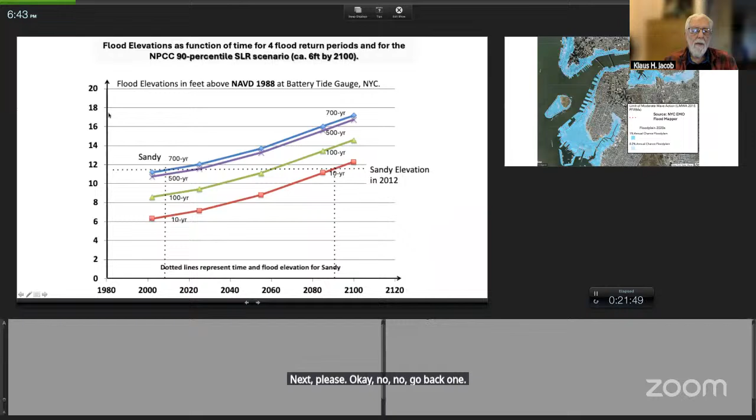Thank you, and can I please have slides? Mission control, mission control, Klaus hailing. Go to the next two. One, two. And then to slide number three. Next, please. Okay, no, go back one. Bad, thank you very much. Maybe go into presentation mode. Yes, please go to presentation.

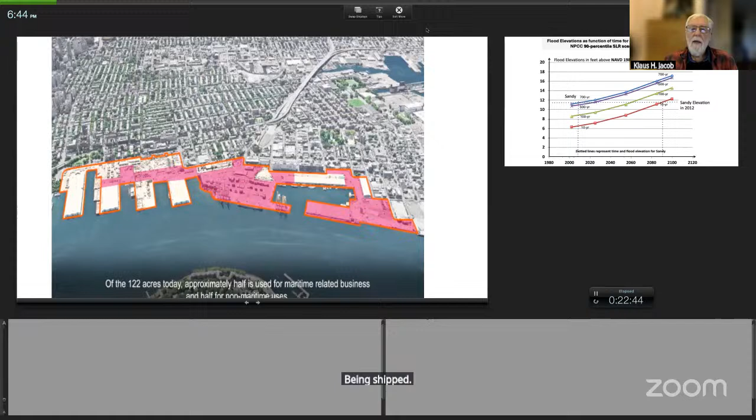Well, maybe I start talking without slides. After all, the Brooklyn Marine Terminal, by its very definition, will have to be on the waterfront to be accessible to ships and goods being shipped.

In that slide you saw for a few seconds, there were red areas and white areas. The red areas are currently used for marine purposes, while the white areas are either unused or for other commercial purposes.

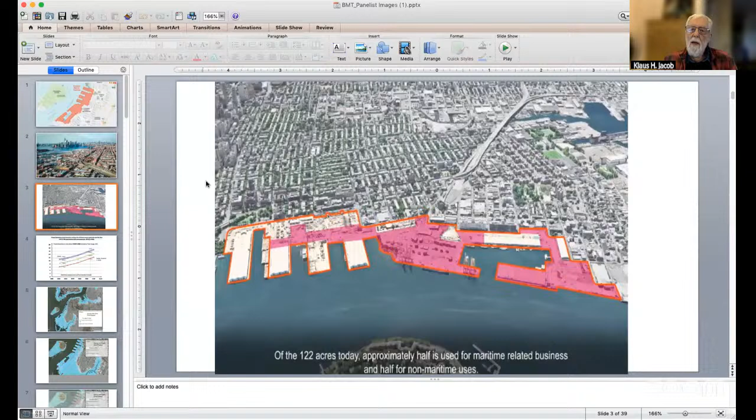Since it is on the waterfront, we have to cope with sea level rise and coastal storm surges on the waterfront itself, and of course with other hazards such as severe precipitation inland, as in that project in Red Hook.

Here you see a scale from about the year 2000 to 2100 in four different colors: the elevations for a 10-year storm, a 100-year storm, a 500-year storm, and a 700-year storm. I won't go into the definition, but a 100-year storm has a 1% chance of occurring in any given year. At the year 2012, or where that dotted line is, that's when Sandy occurred. We are now at 2025, where the next set of squares is plotted on those lines.

As you see, these storm surges get lifted up over time because of sea level rise. That means if you had 11.5 feet of storm surge during Sandy in 2012, which is a 700-year storm, it takes in the year 2090 only a 10-year storm to reach the same elevation. Divide 700 by 10, that's a 70-fold increase in the coastal flood hazard. That's what we have to consider: the combination of sea level rise and storm surge.

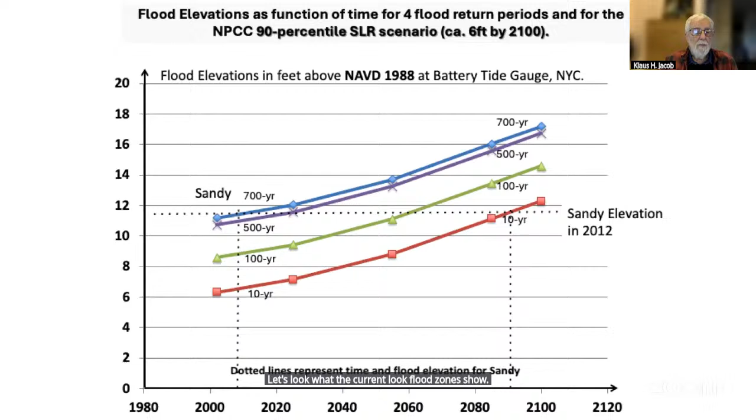Now let's look at what the current flood zones show. This is the New York City Flood Mapper. You can go to the city website under New York City Flood Mapper and find this map. The darker blue is the 1% per year flood zone, and the lighter one is the 500-year, or 0.2% per year, annual chance of flooding.

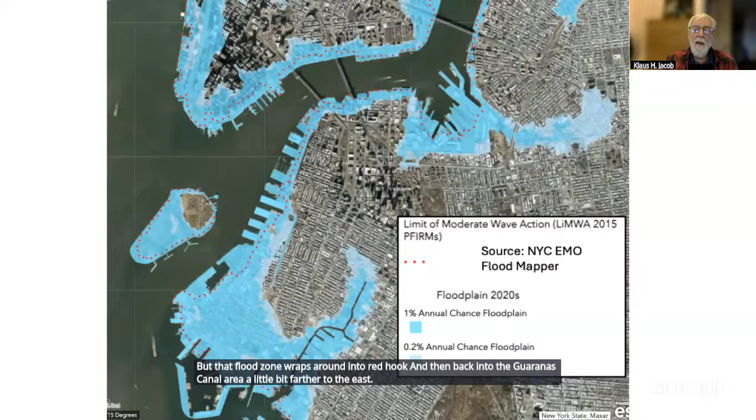And we have the area opposing Governor's Island being considered for the Brooklyn Marine Terminal. It sits in a flood zone. That flood zone wraps around into Red Hook and then back into the Gowanus Canal area a little bit farther to the east.

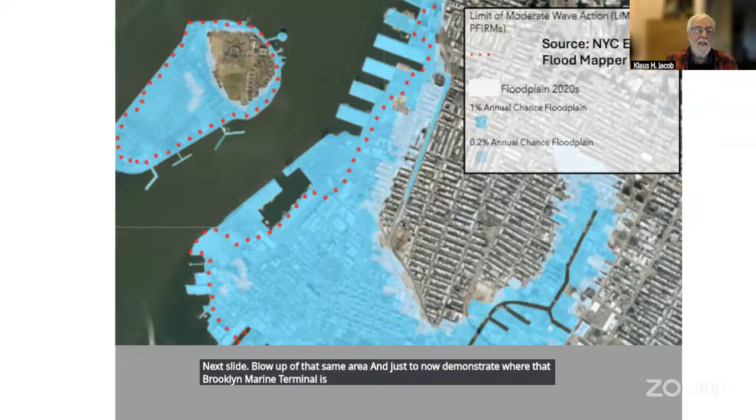Next slide is a blow-up of that same area, just to demonstrate where the Brooklyn Marine Terminal is. Here you have it superimposed. It goes from the northern end of Governor's Island to a little bit beyond the southern end, opposing it, and sits squarely in the flood zone.

So, given that, what are the design options for this project? How do we either protect those future investments planned for the retrofit, or how do we design it if we don't protect them by flood walls, but simply by sheer elevation?

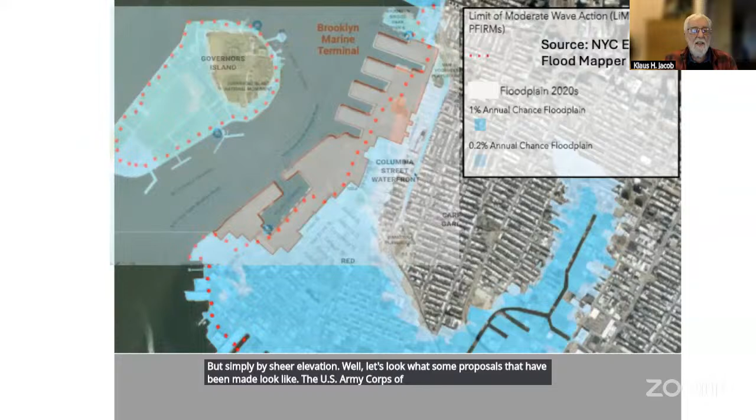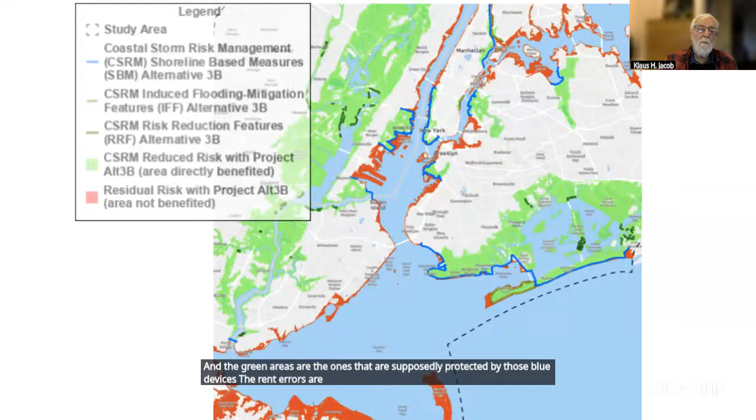Next slide is simply a blow-up of the same thing, where I show with this little rectangle next to Governor's Island where the Brooklyn Marine Terminal sits. As you can see, the Brooklyn Marine Terminal proper sits in the flood zone and is not protected by this blue signature.

It's not clear what the US Army Corps of Engineers plan had in mind, whether they would provide protection with their own financing or with the city.

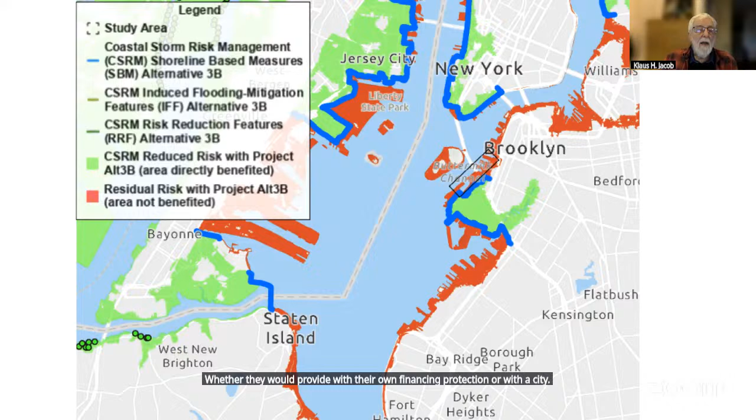And when we look at that, that's what we get. They have a flood protection system at elevation 10 feet above the North American Vertical Datum of 1988, which is the reference for all flood zone maps and other projects.

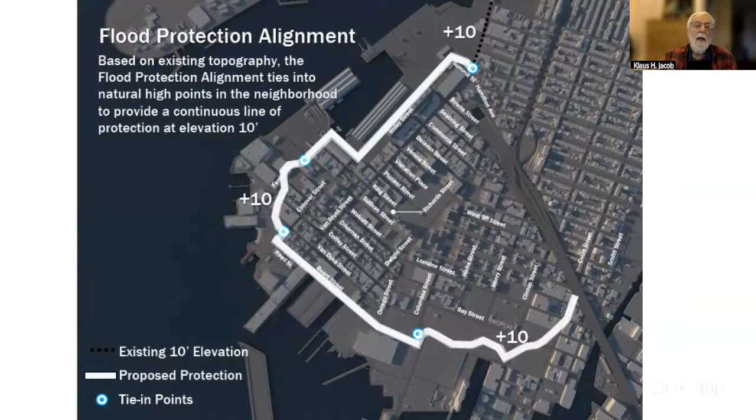If you go forward one slide, you see that only in the upper part of that project does it have a flood wall. Then it simply uses the natural grade of the streets, and then goes again back into the southern part of this project to a flood wall. But it does not connect over to the Gowanus Canal that I showed you earlier—it's an opening for floodwater coming in the back door into Red Hook.

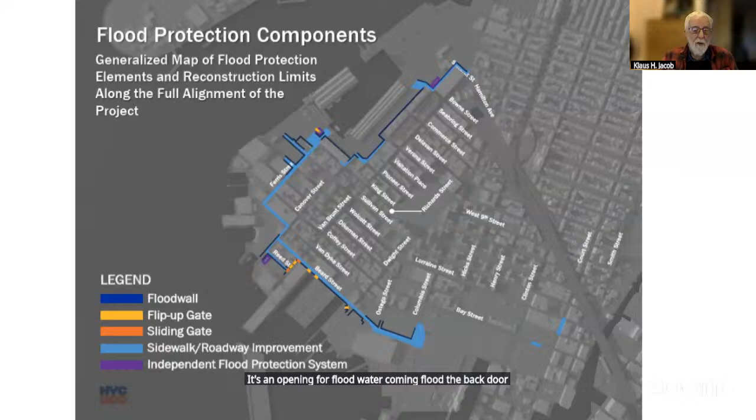Given that, go to the next slide. The area that is protected sits behind essentially the white area, and supposedly a little bit behind it to the northeast, which is where the elevated portion of the Brooklyn-Queens Expressway runs, this dark feature connecting the upper white line with the lower white line. Beyond that, the elevation is high enough that we wouldn't have to worry.

But go now to the next and last slide that I have in my presentation.

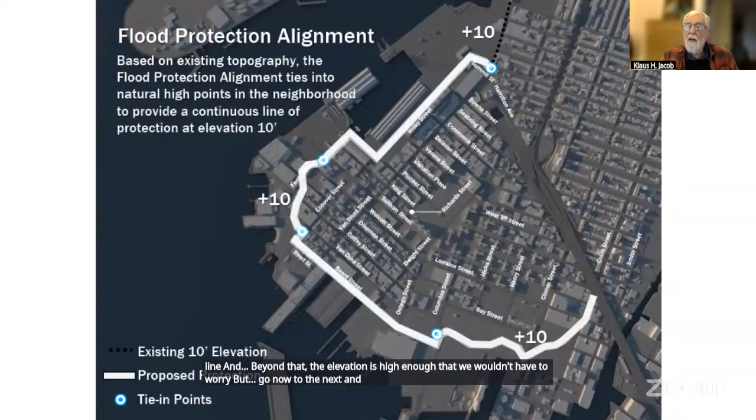Look where 10 feet is on this earlier plot that I showed you. At current sea level, this orange line that goes down in the year 2025 covers a little bit more than the 100-year flood zone. But on the waterfront, you also have wave action, so 10 feet is just barely making it. But that's at current sea level.

Now the sea level goes up, and you see where this horizontal orange line at 10 feet crosses in the year 2070, the 10-year storm surge, which means that the flood protection the DDC is having in mind will be overtopped already just by a 10-year storm, not to speak of the 100-year storm, which will be overtopped in the 2030s.

So I do not see at this moment what this project has in mind to protect its own properties on the Brooklyn Marine Terminal property proper, or anything behind in the neighborhoods of the Columbia Street waterfront district or in other portions of Red Hook.

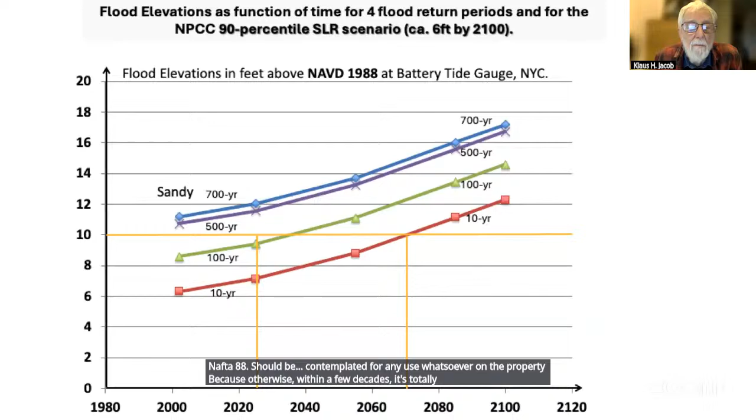My suggestion is that no elevation below 14 feet, NAVD 88, should be contemplated for any use whatsoever on the property, because otherwise, within a few decades, it's totally wasted investment. Thank you, and I hand over to, I guess, Gita is the next speaker.

Thank you, Klaus. Hard act to follow.

Klaus has an incredible amount of detailed information, but I have to say it's actually really, really critical and very important to be looking at those hard numbers in terms of our floodplains and our sea level rise in order to truly understand the potential of both the site and the neighborhood in general.

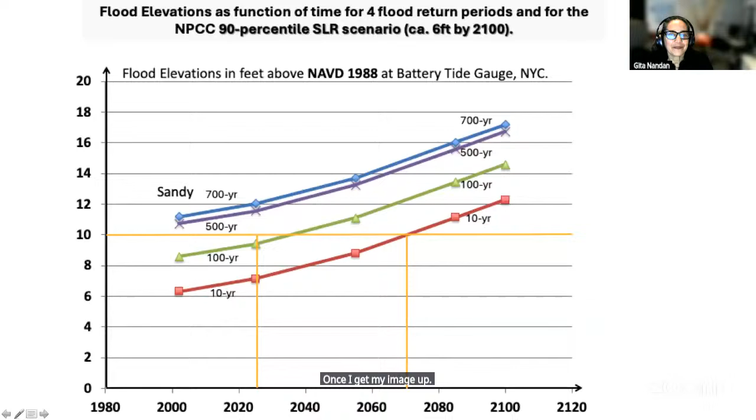And with that, can we have my first slide, please? I am going to try and keep my portion succinct once I get my image up. And so, playing a little bit off of Klaus's presentation on the data, which is very important as a starting point. Data is where we should always have our foundation for planning our futures.

And so the question really is, how does this BMT project, which lies on our shorelines at over 120 acres—we just heard close to 200 acres when we look at the water being included—and it also stretches for about 3 miles along our coastline. Red Hook is about 8 miles in circumference, and the BMT is about 3 miles. So a third of our coast, which, when we're looking at coastal edge protection, is a real significant player.

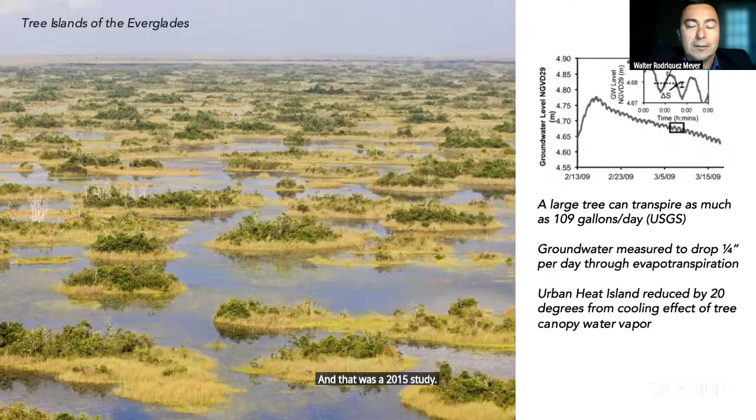In 2016, my firm was commissioned to design Miracle Mile and Giralda Plaza in Miami, in Coral Gables. It was a soggy district that would flood with summer rains.

We took that Miracle Mile concept and embedded in it Dr. Leonard Scinto's science—his work on whether an entire district could become a tree island and help lower the groundwater. It was published in the New York Times because it worked so well that it was tested by Hurricane Irma, and a lot of the businesses were able to open the next day after one of the heaviest rains in many years in Miami's history. It took Miami many months to recover from that event, but in Miracle Mile, it was untouched.

Next slide. How do you take a tree island concept and bring it through an entire district? You look at the subsoil, the subsurface condition—excavating the impervious urban fill in a city to get down to the porous subgeology, and connect the groundwater to the trees by creating a porous soil condition through structural soil or other means of getting connectivity from the surface to the ground.

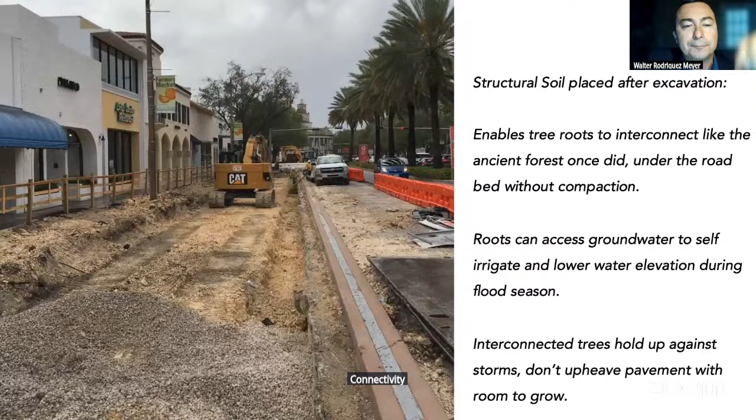Next slide. In this project, it involved excavating the entire right-of-way from facade to facade, backfilling with structural soil. For lack of a better term, we call it a living street, because there are tree roots under the travel lanes. Miracle Mile had travel lanes that were a state highway coming through the city blocks. Giralda Plaza was a local street converted to a promenade that occasionally has traffic and was rated for fire truck and sanitation vehicles, which come through daily.

Shop owners can put their alfresco dining out of their shops and gain square footage, and at night they fold that up—the shop owners manage the street. This is just to show that you can design streets in low-lying areas by managing groundwater to buy time.

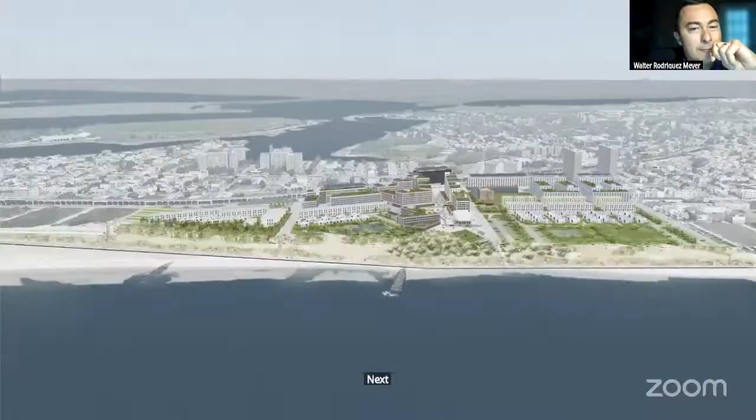Some of these specs are starting to be built in New York. We had projects built before Hurricane Ida that were pilots in the Rockaways. Rockaway is comparative to Red Hook, similar elevations, in some places lower. It's kind of the canary in the coal mine for New York City. This project, Arverne East, is the same acreage as the project we're discussing today. It's just slightly over 120 acres, several billion dollars in real estate coming, and that's now under construction.

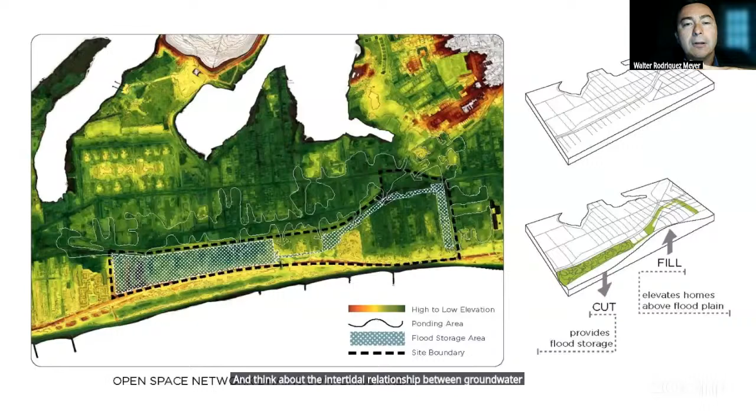This project started with groundwater, and we're recommending that as BMT moves forward, to connect itself to the groundwater, to connect itself to the bathymetry in front of it in the salt water, and think about the intertidal relationship between groundwater and tidal water. Why? Because from there we can build out not only some of the cultural dependencies in water that Carter Craft laid out, but we can start to build resilient infrastructure that is holistically managing water from clouds in the sky to the water in the ground underneath.

In the case with Rockaway, it was a story of Arverne East taking a cut and fill balance project that understood that the ocean side is high elevation, the bay side is medium elevation, and the bowl in the middle is where the groundwater is most exposed. So the most frequent flooding happens near the middle of the peninsula, not at the edges. And you may see in Red Hook during king tides, you may be blocks from the bay or from the harbor and see water bubbling up in the drains. And that is normal in Rockaway as well.

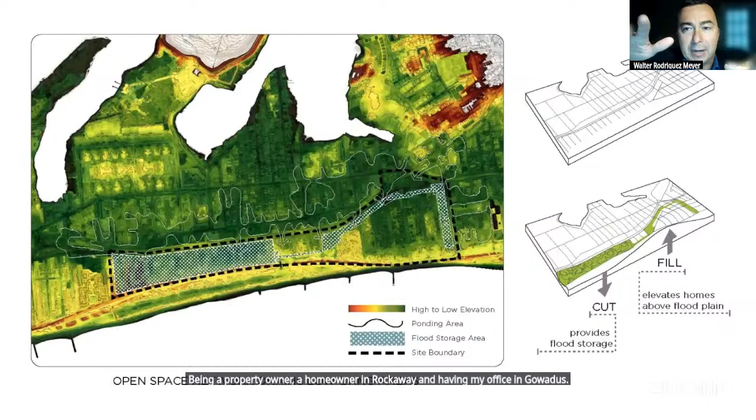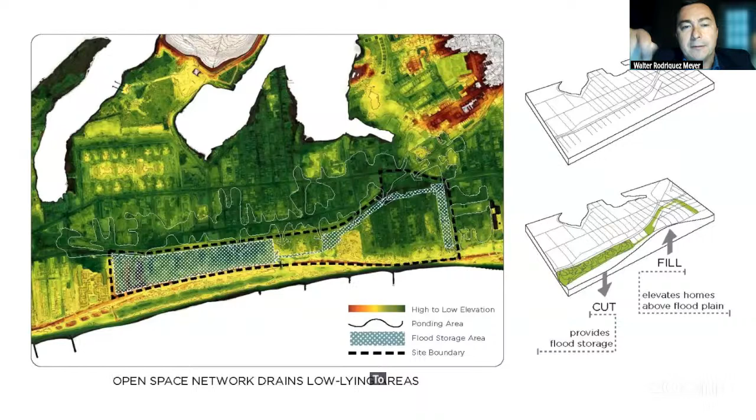Being a property owner, a homeowner in Rockaway and having my office in Gowanus, I compare the two of them and I take my motorboat from my bay house in Rockaway to Gowanus Canal. It takes about a half hour to commute. And that allows me to see the correlation. Sometimes on a king tide, I can see drains that no longer flow.

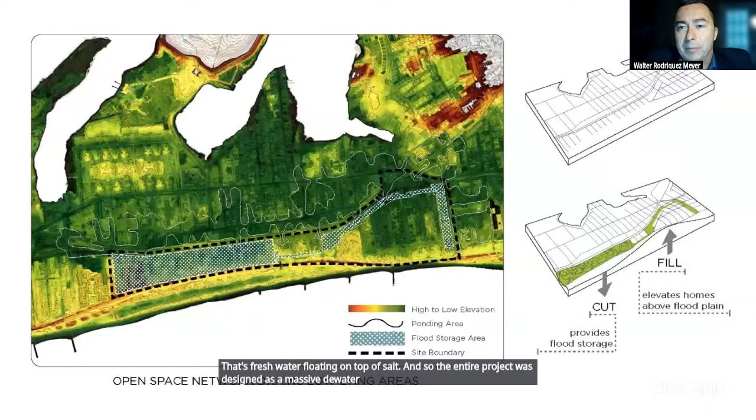And in places like Rockaway, when those drains backfill during the king tide, your only line of defense is green infrastructure. So this project took that thin white line you see in the center, which is the kind of freshwater bubble that's exposed during king tides. That's fresh water floating on top of salt. The entire project was designed as a massive dewatering project using soil-based subsurface gravel wetlands and connected rain gardens.

Thinking holistically across jurisdictions and funding, so not just think of BMT, but think of the neighbors around you and the businesses around you. Red Hook is unique in that there's very few lots that are discontiguous, and organizations like the O'Connell organization have really been thinking about the business side of things. It's one of the largest landowners outside of the city in Red Hook. I think integrating business into this, also integrating the community, and activating the water as much as possible.

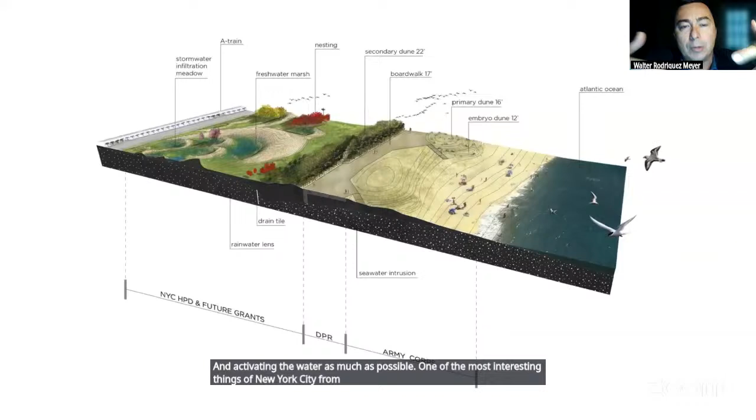One of the most interesting things of New York City for me as a maritime person is South Street Seaport or the Mary Whalen, which is in Red Hook, to visit those boats and have more boats activated, both for private, public, institutional, and all layers of culture in the water, not just at the water.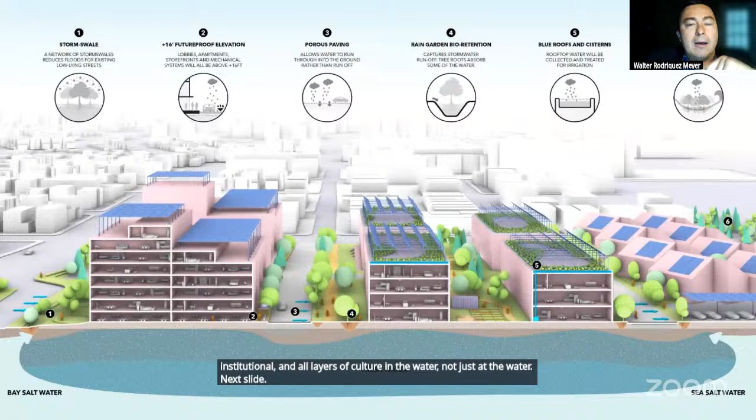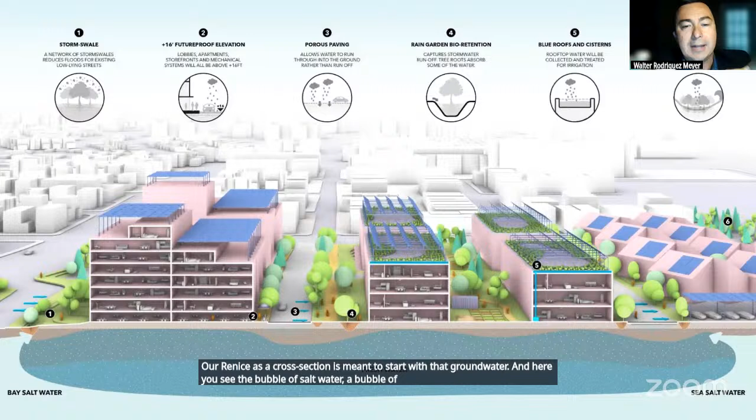Arverne East, as a cross section, is meant to start with that groundwater. Here you see the bubble of salt water, a bubble of fresh water floating on top of salt, and how that's co-managed throughout the project. We elevated to +16 for the streets and the first floor elevations to all match, so urban design is resilient, not just elevating the buildings only. The adjacent neighborhood had low-lying streets, so we improved their condition by creating a belt of low-lying green infrastructure that's the lowest point in the neighborhood, which helps to de-water the existing streets, not just our own.

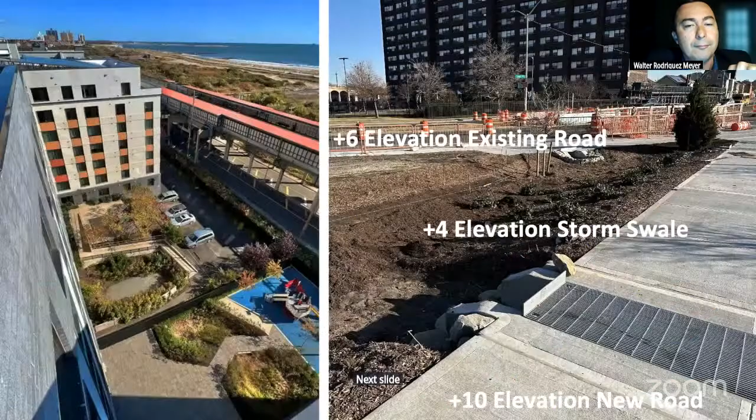This is photography fresh from the site. Pardon the roughness of the construction, but it indicates how we get from the high ground of 16, on the right of the slide, sloping down with ADA compliant universal slopes to the existing roads, which are +5 and 6, and then having even lower network green infrastructure that is a mile long of network systems that de-water the groundwater. The issue in New York City right now is our guidelines only allow for green infrastructure that's above the groundwater, several feet above, which eliminates zone 1.

That eliminates Red Hook from technically having green infrastructure. What we've introduced by partnering with Nick Patnotny from DOT and DEP, and Alan Cohn, is creating pilots of built subsurface groundwater management green infrastructure that has a new set of rules transferred from other jurisdictions.

Some of these projects were built before Ida. The image on the left is Beach Green. It had a groundwater management landscape as well as a bioswale for managing surface water and roof runoff. This entire slide is all one big living system below the surface. So below the parking lot, below the porous playground, below the porous paving, all that stuff is interconnected with one big root system through one massive structural soil that goes several feet deep.

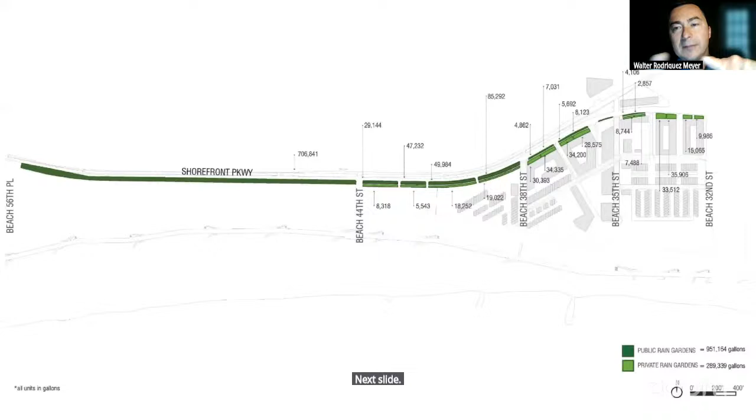As I mentioned, this is a cloudburst street. It's built, and we can go do field trips in the spring. It's over a mile long of networked green infrastructure. Stormwater is managed in the street, at the edge of the street.

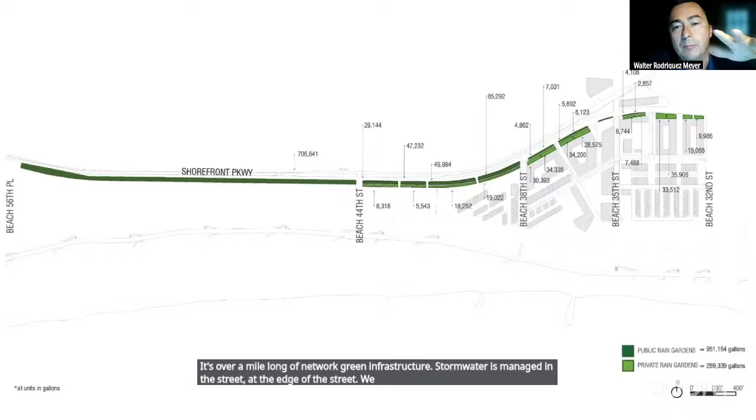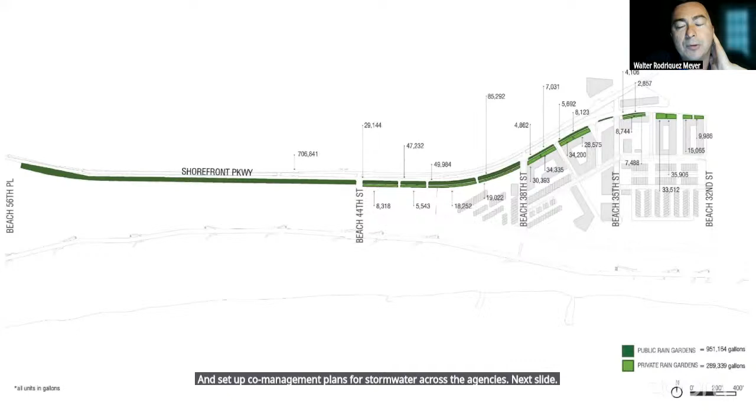We partner with the Parks Department to manage water and set up co-management plans for stormwater across the agencies. Next slide. We keep over 1 million gallons of stormwater that could have legally discharged into Jamaica Bay, and it's now used to irrigate this linear system. It's important to manage water.

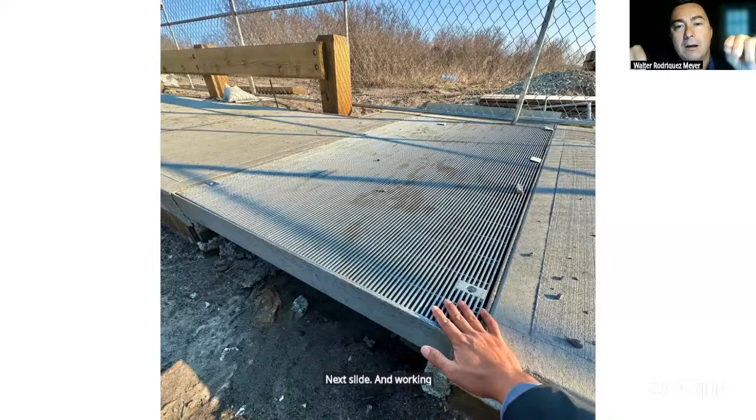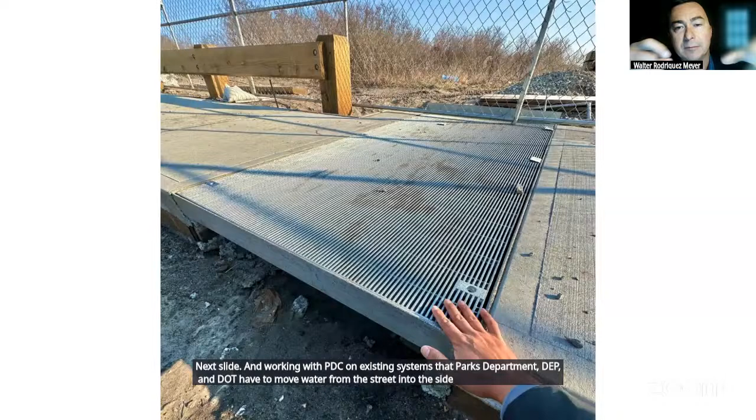We have systems for private property as well as public. Next slide. Working with PDC on existing systems that Parks Department, DEP, and DOT have to move water from the street into the Parks Department side, and embracing that grate aesthetically and architecturally.

Next slide. It's very complex to pull this off in New York—to bring together the Army Corps, DEC, MTA, DOT, all the different agencies we needed to move water across jurisdictions the way nature intended it to flow. So it's not easy, but we pulled it off.

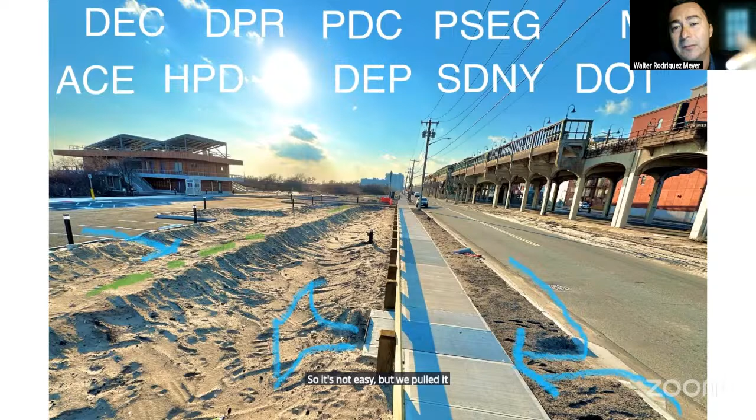It took a decade to do this project. Next slide. I'll leave it there, but the big takeaway is we had a lot of successes with Ida, but also a lot of imperfections. One of which: we wanted to change the legal grade of the Queens datum, which is currently plus 8. By definition, legal grade is an invisible line that exists above existing streets.

So if you have a street that's plus 4 in Red Hook, somewhere there's a legal grade to which that street should be moved when it gets upgraded. But the legal grade at plus 8 is not that high. We need to be at a resilient legal grade.

One recommendation I'd make to BMT is to work community-wide—as Geeta pointed out—work with the businesses in the district, work with the neighborhoods around in your watershed, and get that legal grade elevated as much as you can, using this project to spur a layered approach.

Thank you for your time.